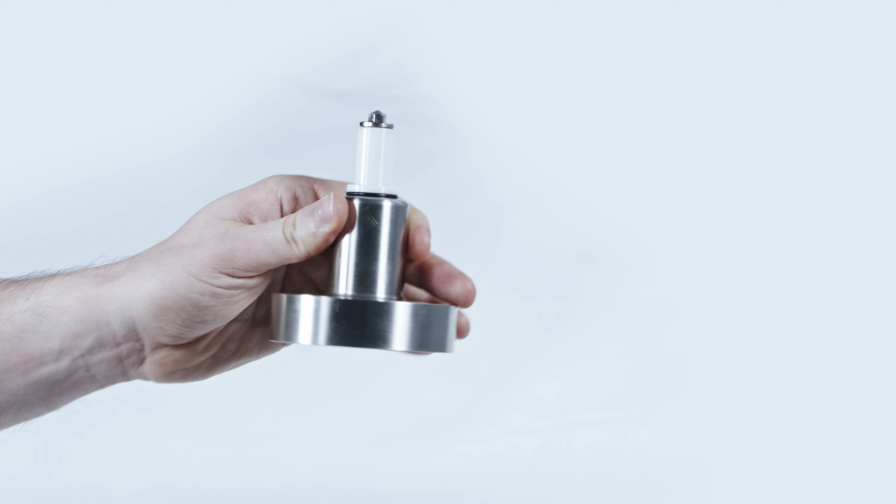At ZETA, we offer two options for the BMRT's configuration. The following video depicts option A, BMRT with Weld-In Flange.

Your delivery package should contain the following elements: a Weld-In Flange, a mixing head, a drive unit, a set of O-rings, and the operating manual.

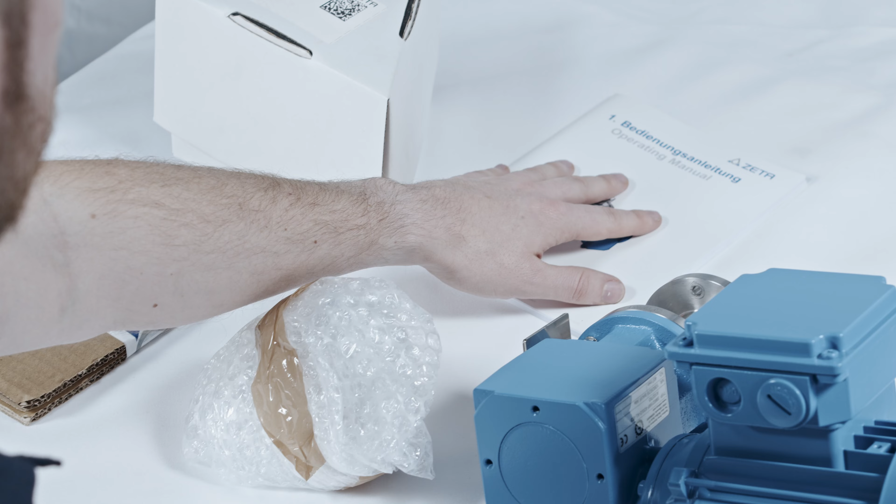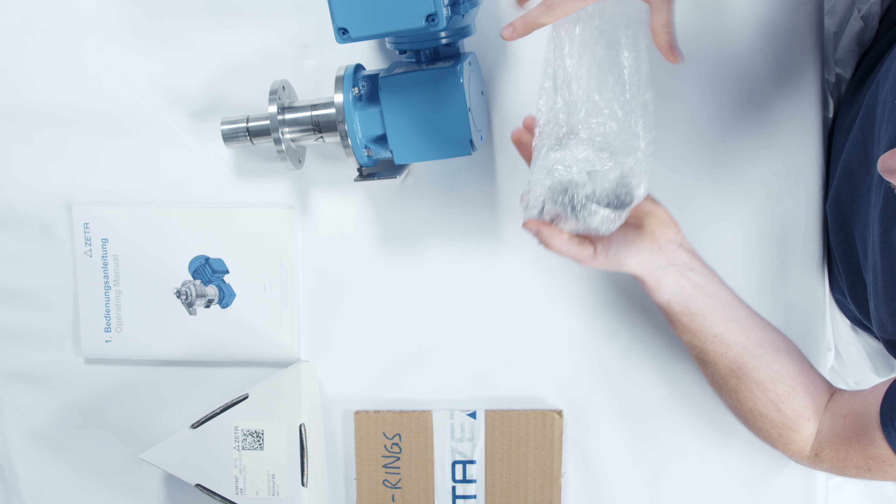Please note, the Weld-In Flange is delivered separately before the rest of the BMRT. It needs to be unpacked without using sharp objects to not scratch its surface.

Here you can see the Weld-In Flange's engraving. It consists of the part number, the heat number, and the material code. Moreover, on the Weld-In Flange, there is only one pin on one side.

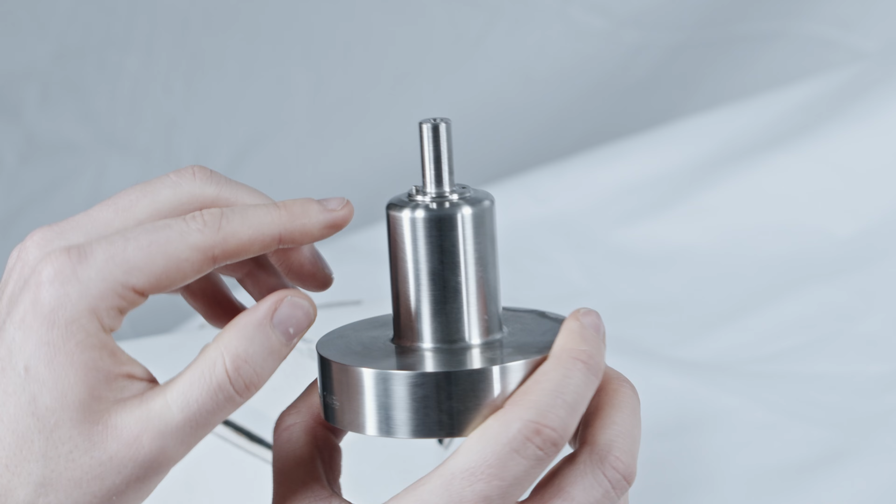As a next step, we unpack the mixing head. But before doing so, let's put aside the drive unit, the Weld-In Flange, and the O-rings.

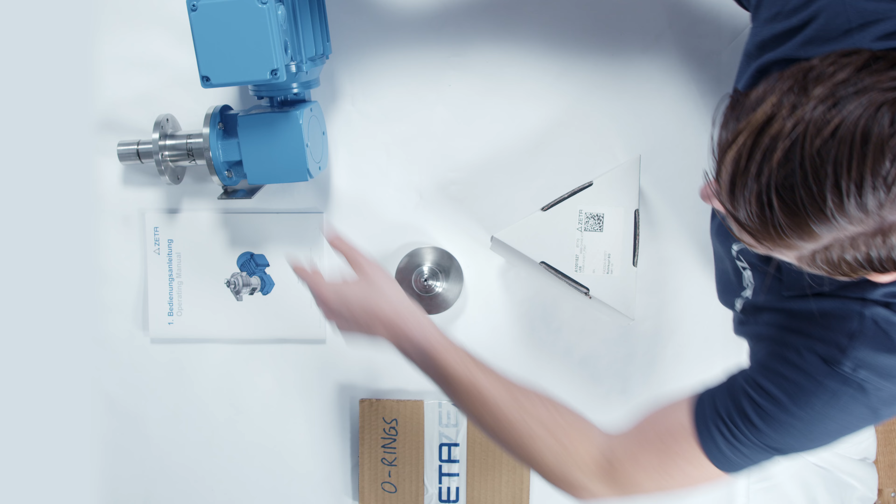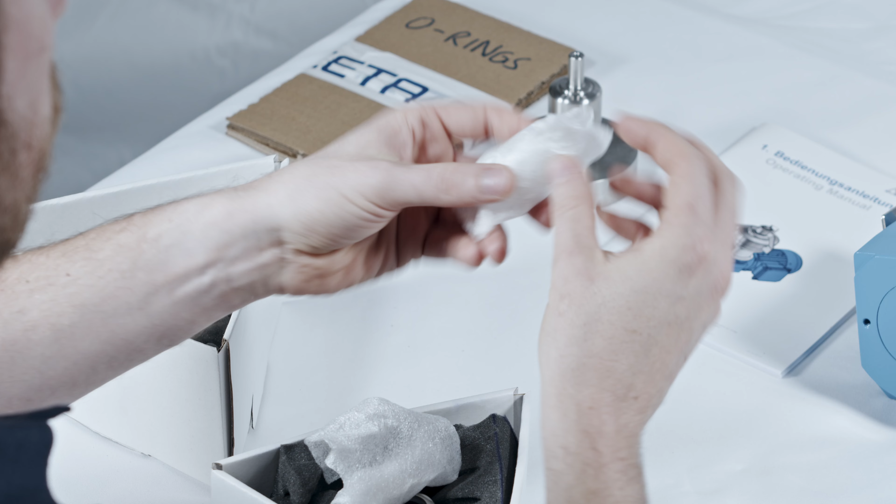In the packaging of the mixing head, you will find a plastic bag containing additional components. Also safely packaged, on the one hand, here we have the inner bearing made of zirconium oxide. You can find an engraving of its lot number on its bottom.

On the other hand, we have a retaining bolt, which looks like this.

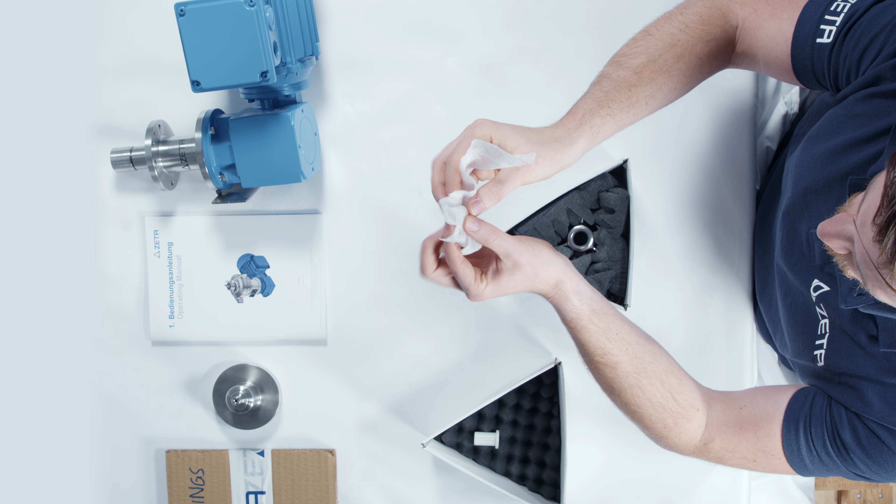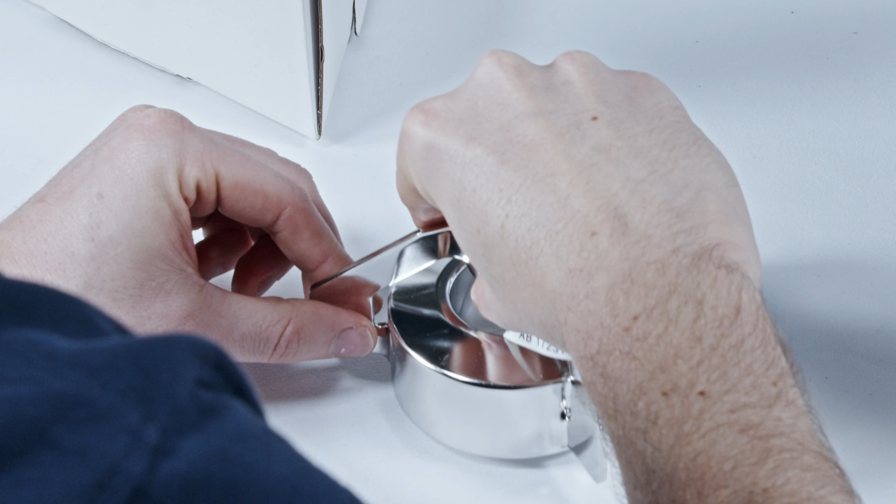Next, let's unpack the mixing head. On it, you'll find a banderole with the production number as well as the lot numbers of the inner and outer bearing. This number allows for a traceability check of the mixing head and its bearings.

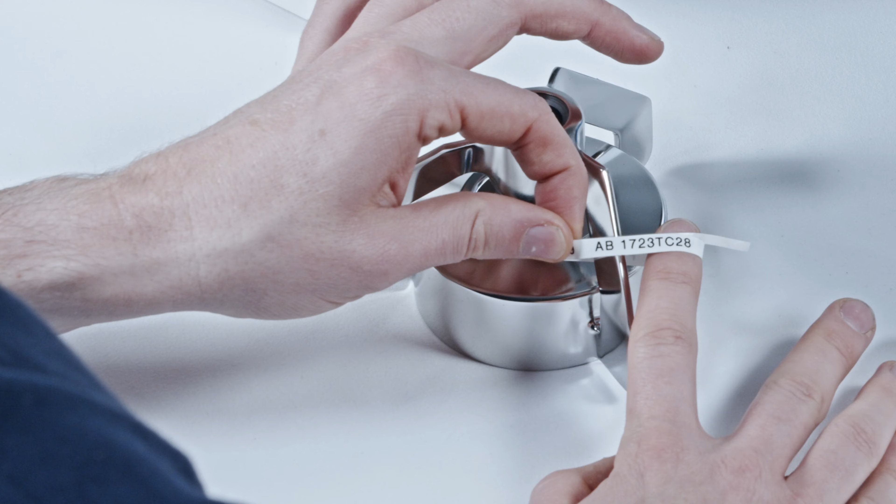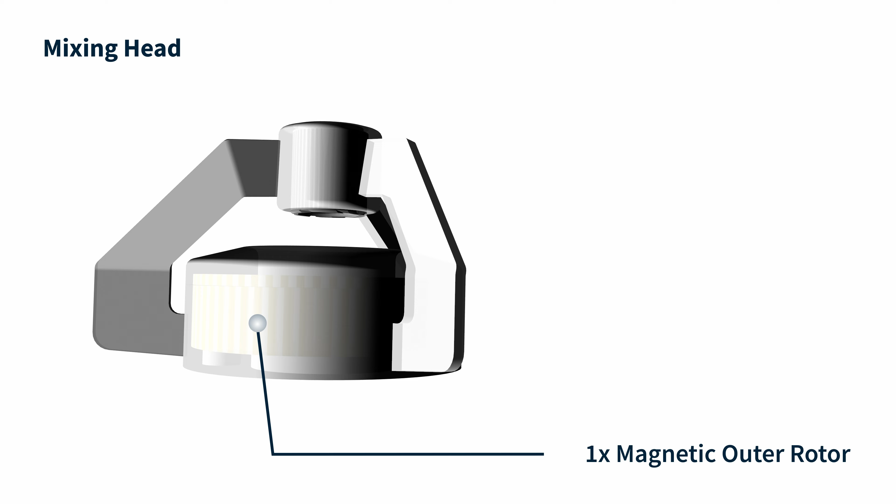The mixing head consists of 3 mixing blades, a magnetic outer rotor, 1 hub, and an outer bearing press fitted into the hub.

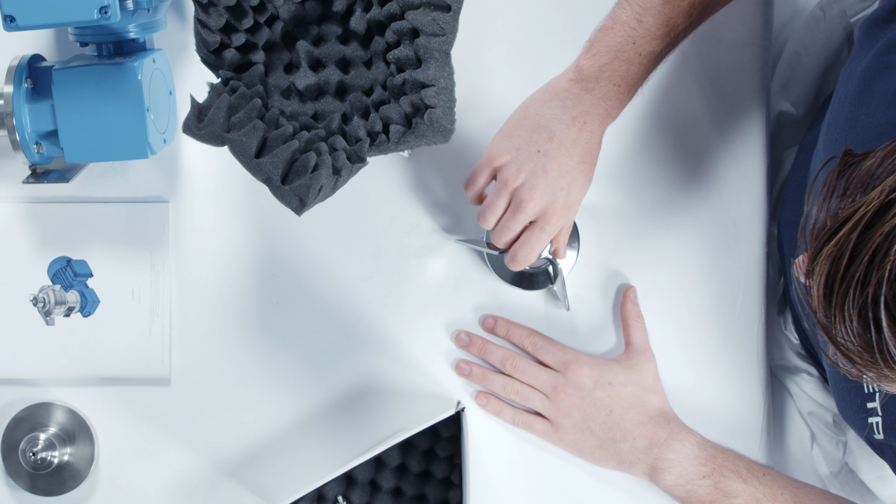Next, we take the packaging of the O-rings and securely open the tape. Inside of the packaging, you'll find a set of 2 differently sized O-rings.

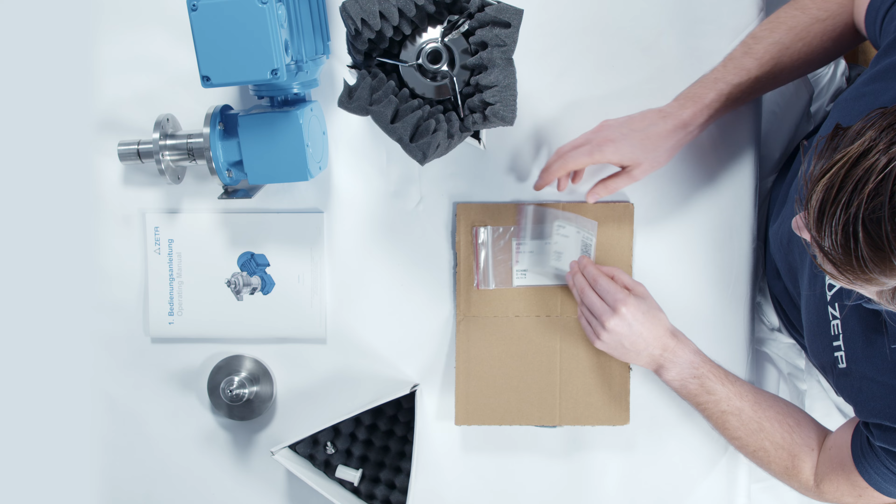The smaller one is to be placed in the groove of the retaining bolt. The larger one is to be placed on the Weld-In Flange.

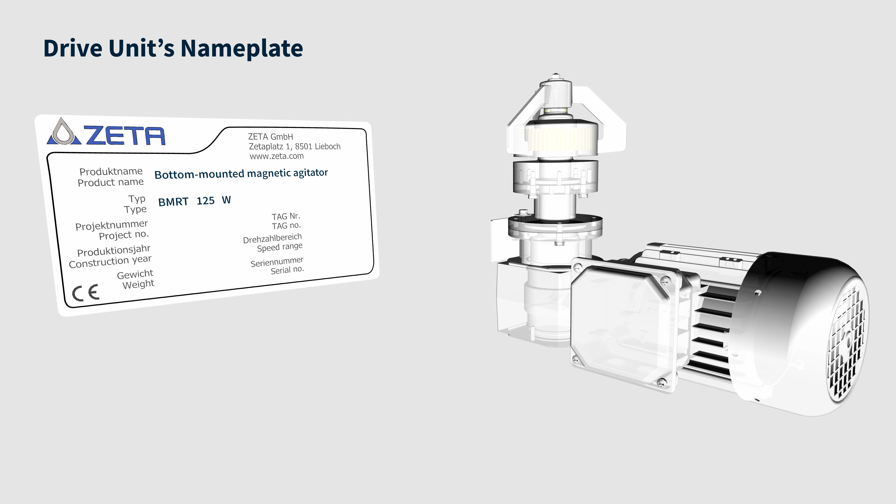Finally, let's look at the drive unit. On it, you'll find 2 nameplates, one with ZETA's production information regarding the delivered magnetic agitator. It consists of the following information: product name, type, project number, construction year, weight, tag number, speed range, and serial number.

Please note that the project number, the tag number, and the serial number are pertaining to the project for which you've ordered our equipment.

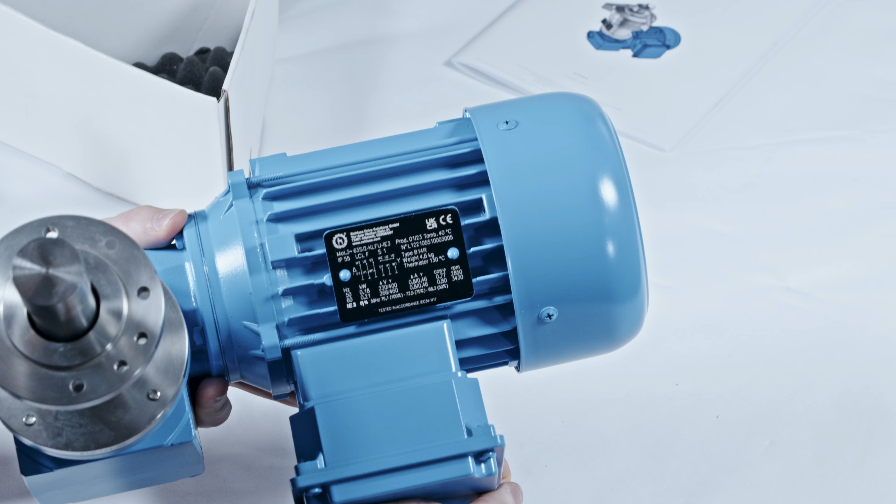And the other nameplate contains technical specifications of the motor itself.